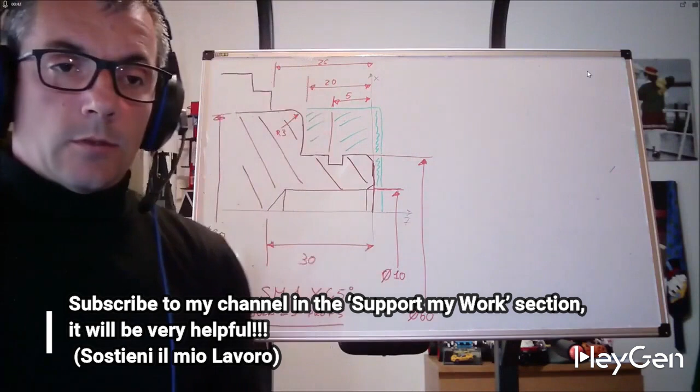We continue with our tutorial on CNC turning machine programming. So, we have seen in these videos that we can move in G0, G1 in linear interpolation by entering two coordinates and creating an inclined line according to the arrival point X and Z, or according to the angle. We know how to make chamfers, and we know how to make radii. We have recently discovered that we can correct our profile to make it exactly uniform with the drawing by adjusting the tool radius correction.

I tell you that outside of threading, if you have followed our tutorial up to this point, you are able to execute the programming of 100% of the parts that can be obtained for two-axis turning operations. Let's do a small example. This is a small example of a piece that I came up with. We have never talked about grooves, we have never talked about drilling, but we have talked about programming in X and Z. Nothing else is needed.

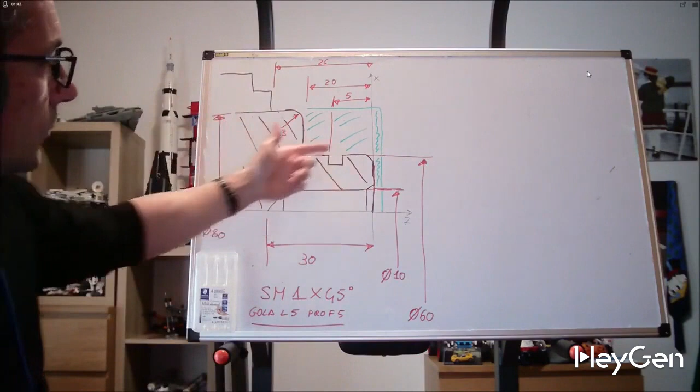Regarding how to manage ourselves, let's assume a metal piece, diameter 80, to be brought to this drawing with a 1 mm excess material on the face. So we will need to face it, hollow it out, drill, and make the groove. Okay, so the order of operations will then need to be optimized based on the tools, the turret, the operations we need to perform, and the type of finish. Let's not worry about that. Let's focus on making a small program. Unfortunately, I only have a whiteboard available, so we will go step by step.

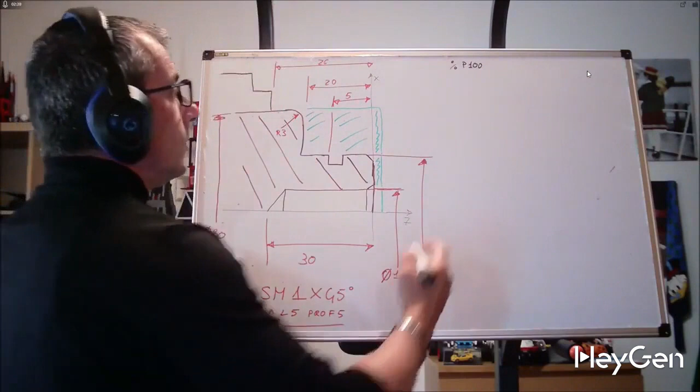So, let's take our program. At the beginning, we need to give our percentage. Let's call it 100. I will refrain from writing comments because otherwise the video would become particularly long and boring, so I will explain a few things. First, we need to set G92 S2000 to limit the revolutions when using a simulator. Here we will also define our raw material to allow the graphics to work for us, becoming our eyes, and we will see it later in the simulator before making adjustments and avoiding unpleasant surprises.

After that, we insert G95, so we tell our lathe that we will work in millimeters per revolution. Let's rotate our spindle. So M4 S200. G96, so it rotates in a sense. Sorry. Then it's not always necessary because small lathes don't have it. Lathes with gear changes will require M41 and M42. Let's set it. It won't hurt. And let's rewrite M4 S200.

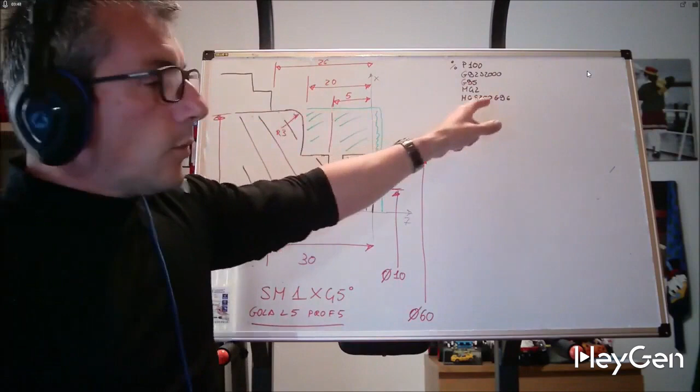G96. Perform the next turning operations at 200 meters per minute. So adjust the revolutions based on these 200 meters that must occur at the tip of our tool. So accelerate as I move towards the center with the limit set to G92. I call a turret T01, and here I will write a nice comment about what tool it is and what operation I'm going to perform. I am going to do the facing. That is, I want to remove all this excess metal in one go. Let's not worry about the correctness of the operations, but about the movements.

Okay, now in rapid G00, I will go to where the piece is. We said it is a raw material with a diameter of 80, so I will go to X85, giving it a 5 mm clearance before going to hit Z0. Okay, very educational. If I were on a machine, what would I have done first? First, a nice X200, Z300, then first Z0 and then X85. I have brought myself here. Perfect. G1, let's do this piece.

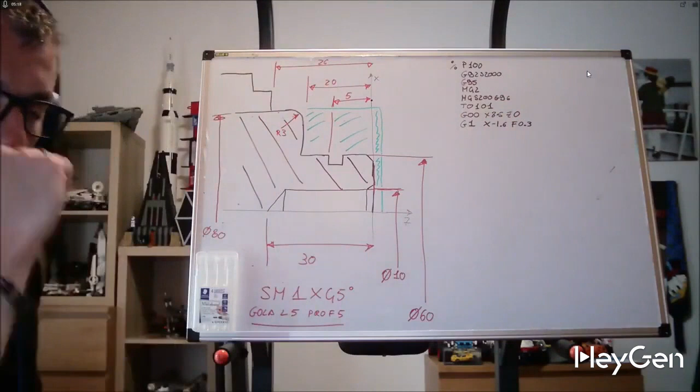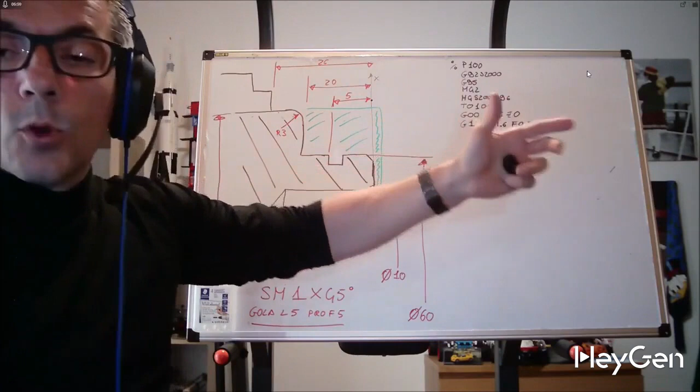G1 X0 actually. Let's say I have a tool radius of 0.8, so minus 1.6 F0.3. All right. This is definitely to get to this point, to correct the tool radius. Do not leave a small bevel at the tip. We have faced our piece. In fact, I always recommend reaching X10 and slowing down a bit, because if the tool is high or low, we could stress the tool tip. I provide you with this information, even though it's more about tooling than programming, but it's good to know. So normally I program G1 X10 F0.3, X-1.6 F0.1 to avoid stressing the tool tip too much.

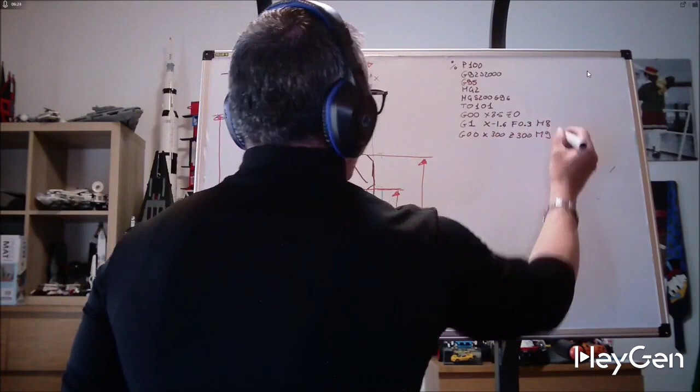Well, I have already faced it, so we have already eliminated this part. G0 X300 Z300. If I had put an M8 and an M9 here, I would have turned on the coolant during the facing and then turned it off. Okay, in some materials it is used, while in others it is not. This also goes beyond pure programming, depending on what you have in the machine. Here, it is not specified whether we are using G40 or G42 with a 0.4 radius, but now we are focusing, I repeat, on the tool path.

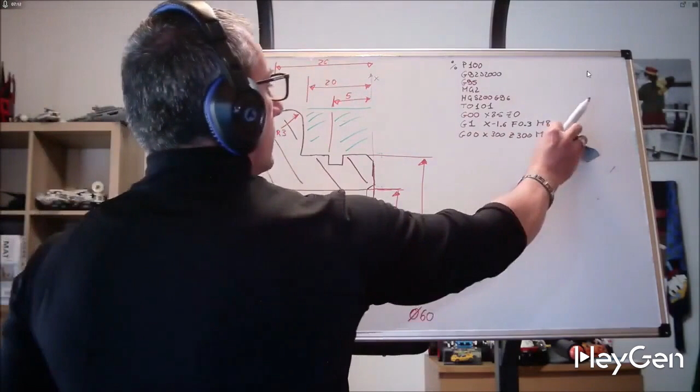Now, we know how to make the profile from point 0 and follow it all the way. This is because our concern is to move in space. Now with the same tool, if I want, I can go and remove all that excess material. So, instead of moving away completely, G0, Z3, I leave the water on. And then, still in G0, so I won't repeat it, X70, let's say we have a nice sturdy insert, and we can easily remove 10 mm at a time.

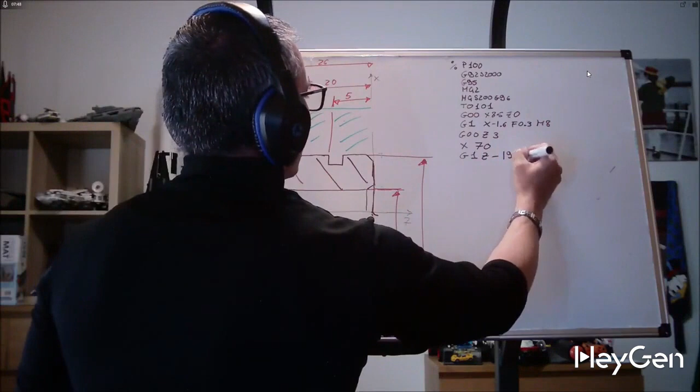So here, G1, Z-19.9. Z-19.9, I have roughened the first part. Now there are two ways to proceed. Excuse me a second, I never remember if U refers to X or Z. So here I can use U10. Do you remember? Incremental. In X, I raise by 10 mm, so I go back to 80.

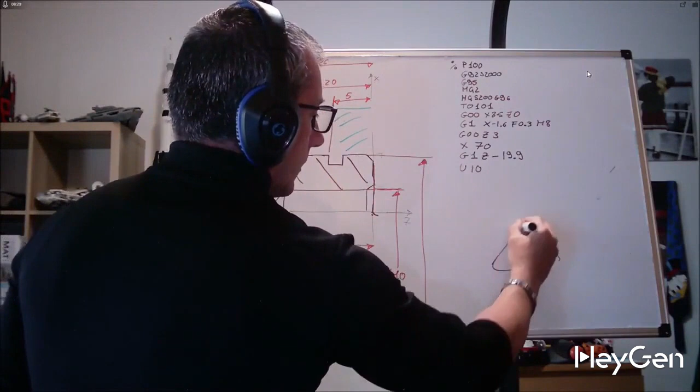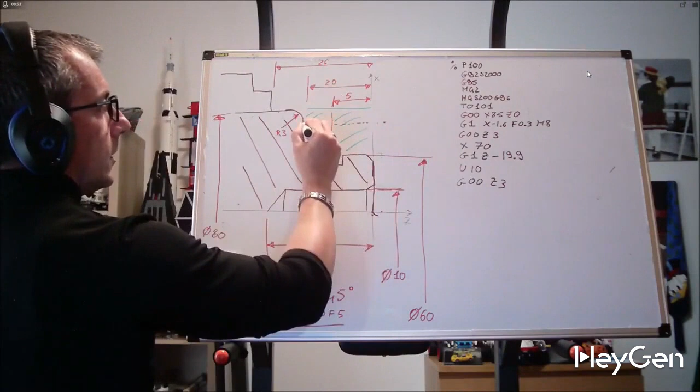And the possible inclination of the insert that is cutting is straightened to avoid unpleasant lines during the finishing phase, G0 Z3. So what I did: at Z3, I moved to X70 quickly, went to Z-19.9, U10, returned to X80, and then G0 Z3, I went back to Z3. Always check if you need to write U10 or U5, because some machines are radial, okay?

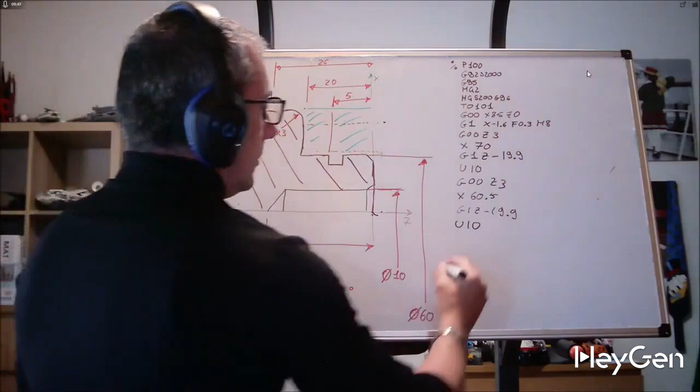Regarding just the U, perfect, Z3, X60. So I will write X60.5 because I leave a bit of excess material, and then I repeat what I wrote above. So G1 Z-19.9 U10. So I positioned myself here, made my pass, raised to straighten the tool's clearance angle, and at this point I can move away quickly. G00 X300 Z300. All this excess material is no longer there, and I did it with point-to-point programming. It's quite a mess.

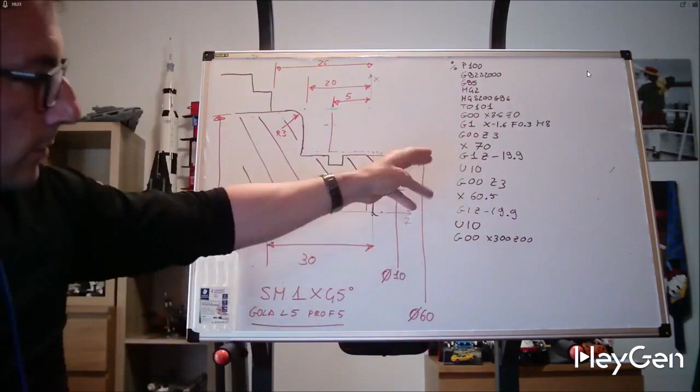Soon I will explain that it's not necessary to do all this, because if instead of 20 millimeters it were a rough diameter of 200, reaching 60, we would need to write 1000 of these lines. But CAD/CAM still output their programs like this, because it has its own logic. Fortunately, fixed cycles exist. In fact, at the end of this brief lesson, which mainly serves to help you understand that you have already learned to program, let's talk a little about fixed cycles and introduce the concept.

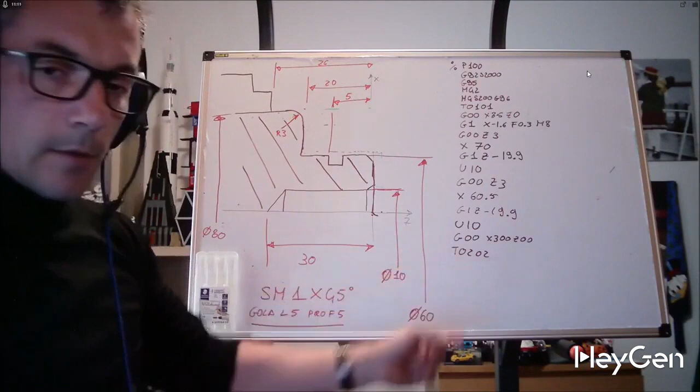Well, what do we do? We change the tool to finish, so T02. If necessary, the cutting speed is also changed. It is always better to include the cutting data when calling the tool. Why? Because if you interrupt the cycle halfway, you can start from the tool recall and it will already read the cutting data. G95 is not necessary, but M4, S200, G96, yes, F0.3 because here we will really take away very little. G96.

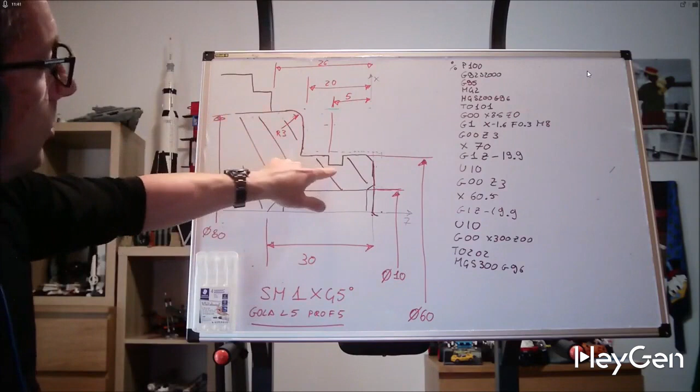Here I move over and do the finishing. So we have 1x45 chamfers, a cylindrical turning, a radius, and a groove that we will ignore for now, because to finish we will use a DNMG insert, a VNMG, at 35 degrees and 55 degrees. Obviously, I can't do the groove, so I will go quickly. G00 Z3. This is 1 for 59, but we are a bit lower, at X56. At this point, what am I going to insert? I will insert my tool radius compensation, G42, because I am moving the profile clockwise.

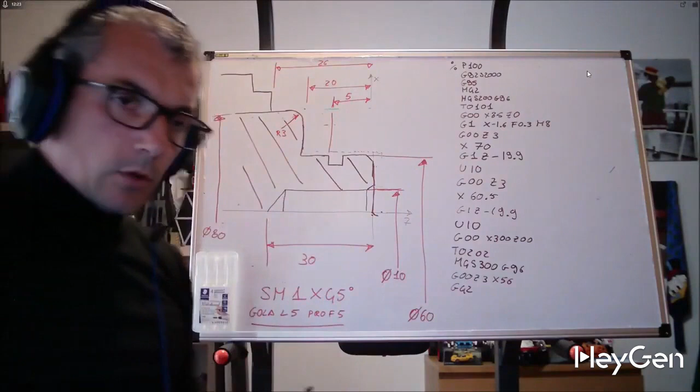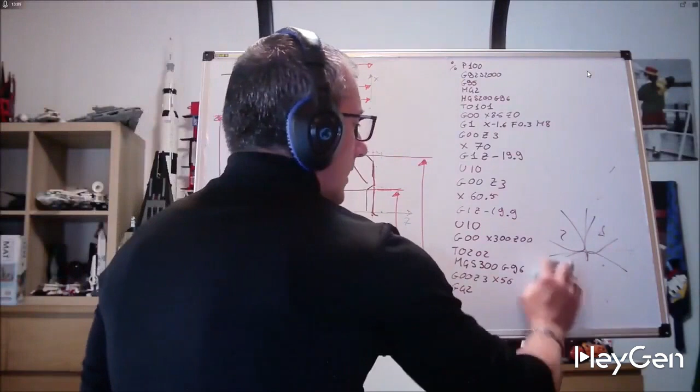G42 will work well if in the tool table, and we will see this later when we do the first program in the simulator, we have inserted the correct tool radius and the correct orientation of the tool. We have mounted an external tool, a boring tool, an external pull, or a boring tool in pull, 1, 2, 3, 4. Each machine has its own way of having this information. There are machines that require this information at the tool change, and fortunately the more modern ones ask for it graphically in the tool table.

We are already starting to get into some very interesting programming concepts, so follow me closely. I hope to convey all of them to you. If you listen the first time and don't understand, try watching the video again. You will see that the second or third time, especially when we take the simulator in hand, these concepts will definitely be much clearer.

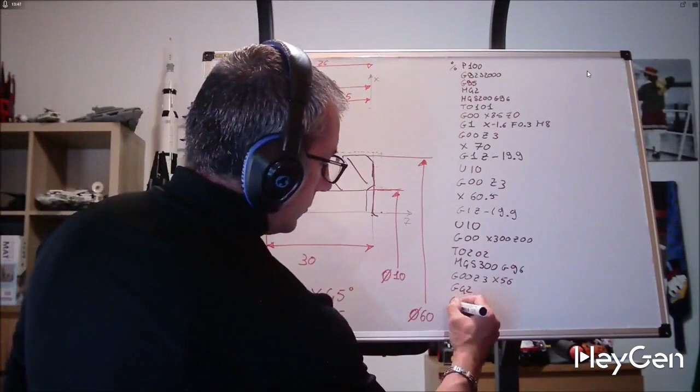Now notice that I have arrived at G00 and only after set G42, Z3, X56, then G1, Z0, F0.2. The first movement, from Z3 to Z0, must always be at least twice the radius of the tool. Otherwise, on some machines, G42 can be a bit troublesome. At this point, let's do our chamfer. Let's make a cool chamfer.

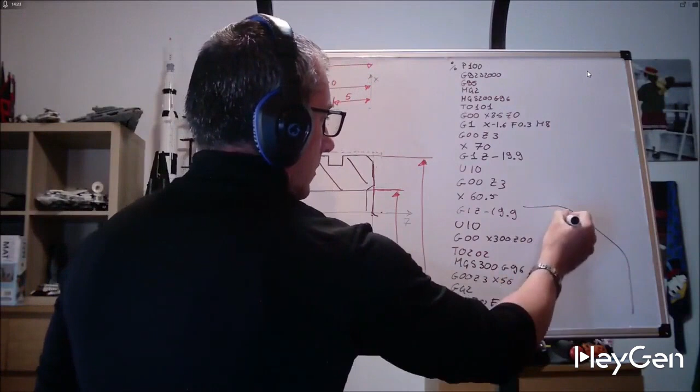So, a chamfer, according to the standards of the automotive industry. Here, and here, and in various other aspects here, are 0.15 R, 0.15 chamfer 1 for 45. This is a remarkably cool chamfer, as the Germans want it to be designed in such a way that we don't use C. Instead, we use both A and R parameters.

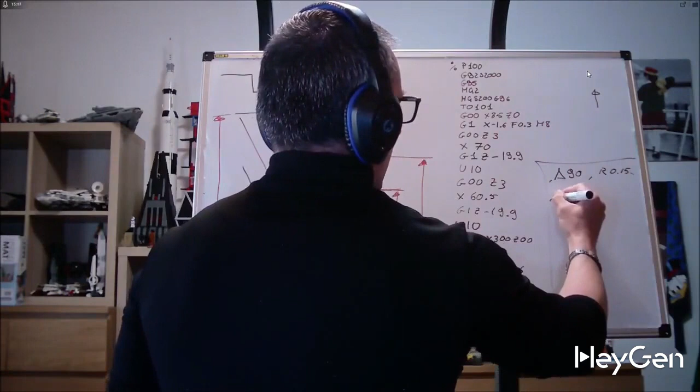How do we create such a chamfer? With our direct programming. So you can choose either option, comma, followed by an A, depending on which CNC machine you have, or also equal if your system supports Siemens, at an angle of 90 degrees, proceed upwards, comma, then R set at 0.15. A 135 Z minus 1. This is roughly a minus Z1 X60.

R0, I'm sorry, but I need to take up more space. As we said, comma, A 135 X60, Z minus 1, comma, R 0.15. What does it mean?

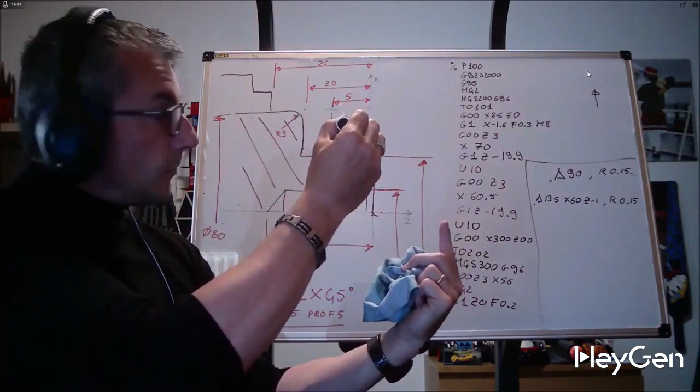I go to X56, Z0. I'm here, then I tell it to go up. At 90 degrees, I give it some information, you stop at Z minus 1 X60, and you reach 135 degrees, which is 45, and in both cases, it finishes the trajectory with a 0.15. Here the machine can go here, making the cool chamfer. G1, which is not necessary to repeat, Z minus 20 X80, comma,

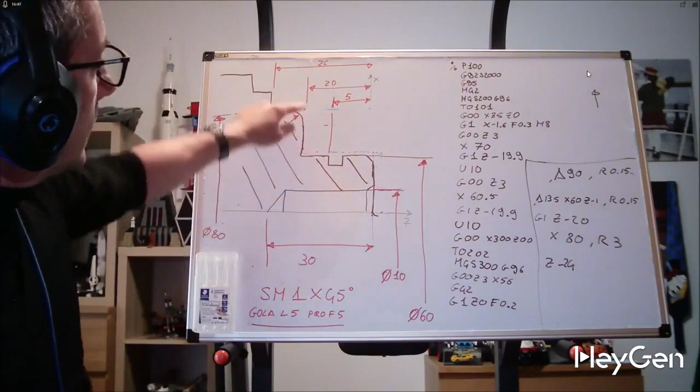R3, Z minus 24, and we have arrived here. Look, we have reached the end of the chamfer. G1, Z-20, X80, R3. So it finishes the trajectory with a radius of 3 and goes to Z-24. Be careful. If I had written Z22, I would have obtained a radius error. This Z must be at least 3 mm and a hundredth superior in movement, otherwise it can't give me the radius of 3.

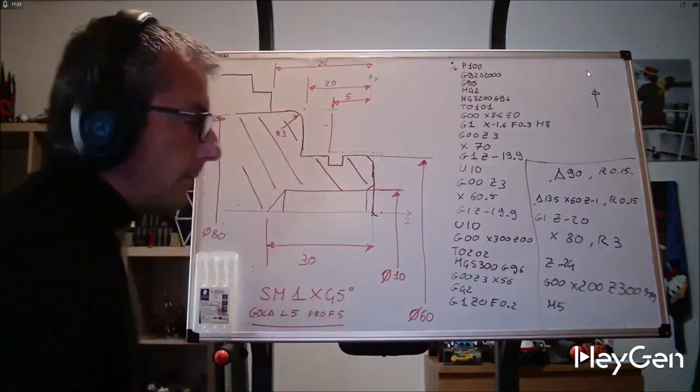G00 X200 Z300 M9 M5. Well, now I will continue programming M9 to stop the water that I turned on here, and M5 to stop the M4, that is the spindle. You see that with our programming made only of X and Z, without macros, without complicated things like macro instructions or fixed cycles, we have profiled our piece.

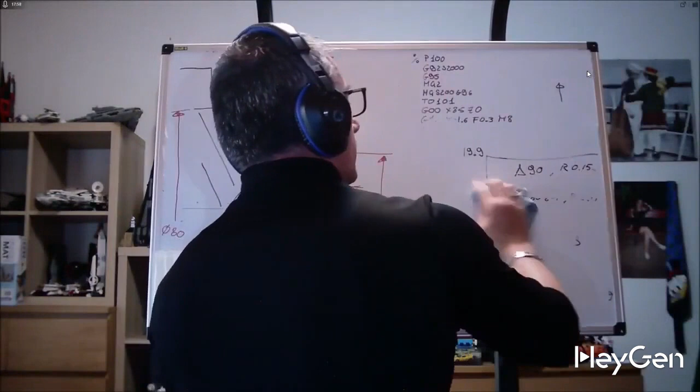Okay, we have profiled the piece, but now we have a hole to make. A hole or a groove is point to point. I will completely ignore this chamfer. So, to drill, just take a bit, zero it here in Z, and set it to 0 relative to X. So when I want to drill with a bit, I always drill at X0, unless I use an insert bit.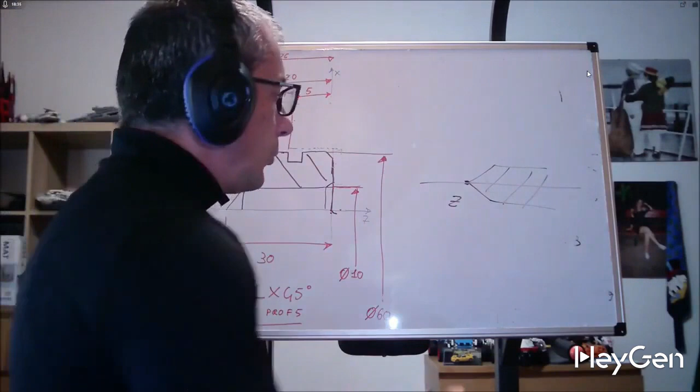The insert bits are 180 degree bits. If we look at them like this, they have an insert here that we will see, and an insert here that we won't see, interchangeable. If I have a 32 bit, I zero it at this point like a reamer and drill at X32. If I have a 40 bit, I drill at X40, with the small detail that they usually have 0.8 tenths depending on the diameter of the bit, even 1 and 2, a type of off-center. So a 32 bit can drill at 32.8.

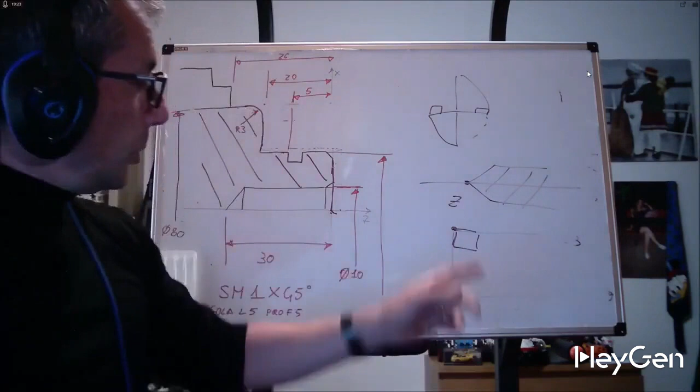Insert bits are very interesting because after drilling, they can retract and work like reamers. Okay, now we stick to the classic, to not complicate life too much. But we don't complicate our lives with insert bits. On the contrary, we make it much easier. Trust me. But let's stick to the classic and drill with a 10 spiral bit, simply. So, when drilling, nowadays the bits, unless using special materials or very long holes, a hole with a diameter of 10, approximately 30 millimeters. Therefore I call my tool holder

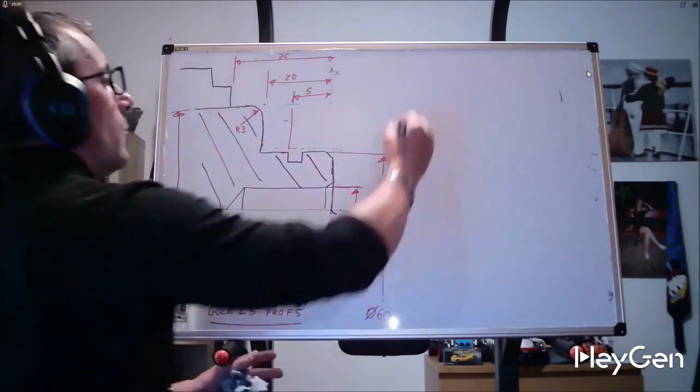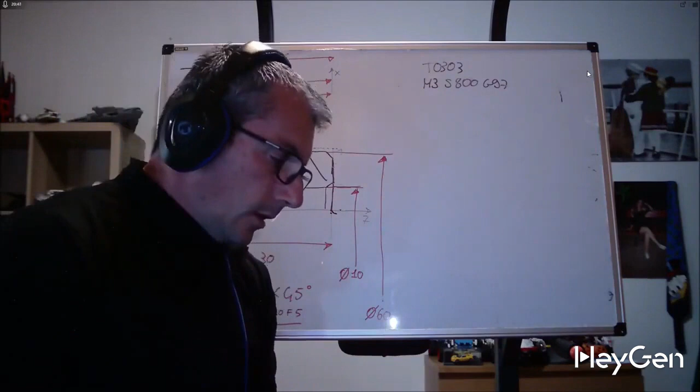The tip gets inserted into position. However, since they're programmed based on their diameters, one can operate them either with constant RPM, or choose constant cutting speed, both options providing great flexibility.

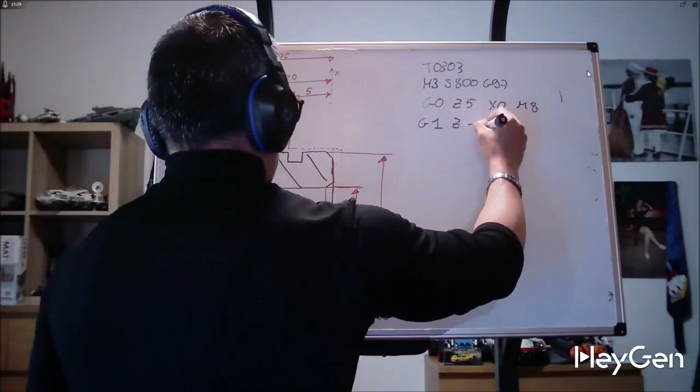X0. M8, water is always very important, essentially. I position myself right here in front, and then I proceed with G1, Z30, F0.12, G0, Z5, and I come out. I successfully made it brief, very high performance. An efficient drill, I enter in one solid body and exit.

In reality, we have specific macros that allow us to effectively break the chip, so we set the feed rate right away, so we absolutely don't have to worry about it anymore. F0.15, yes. Indeed, the feed can also be set in a single block, not G1. We will carry it forward until we eventually recall it. Then G1, Z5, let's do 10. Otherwise we'll do a lot of unnecessary steps. 10, W1.

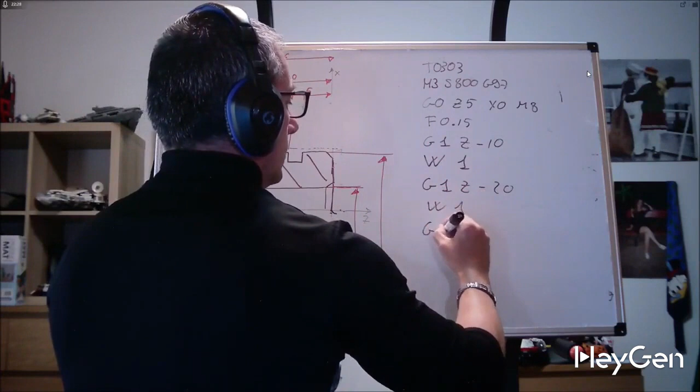G1, Z20, W1, G1, Z30, G0, Z5, every 10 millimeters. To the depth of the material, we have broken the chip. And then continue to ensure precision and accuracy in the process and maintain the integrity of the operation. We returned in incremental mode by 1 millimeter on the Z-axis and then moved forward to Z20, then incremental by 1 millimeter. Of course, we can do it millimeter by millimeter.

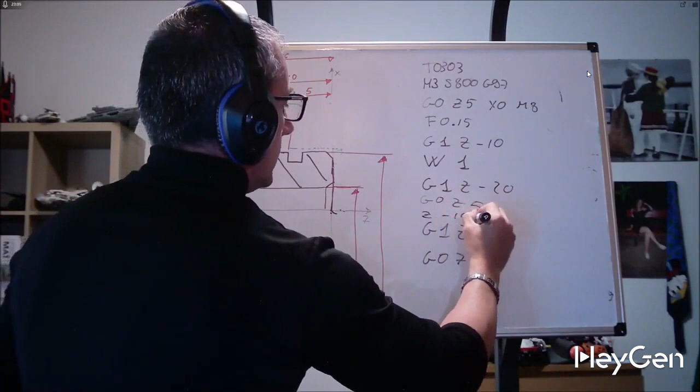We could even exit the piece, that is, instead of W1. Let's do it here instead of W1. We could put G0, Z5, Z19 here and then start. Okay, I mean to really clear the chip, because at the tips, chip sometimes doesn't break, it gets in the way, and when the chip doesn't break, what breaks is the tip.

Which macros help us? Okay, I repeat. With the current tips, especially on steels, there isn't this great necessity. But on aluminum maybe, because it doesn't clear. It can be useful on the FE that makes very long chips. It can be useful to have this discussion about chip breaking. The macros help us, but with our simple and straightforward programming, we can also do this.

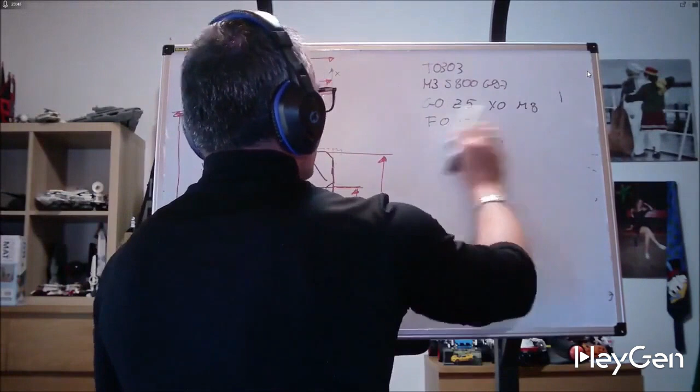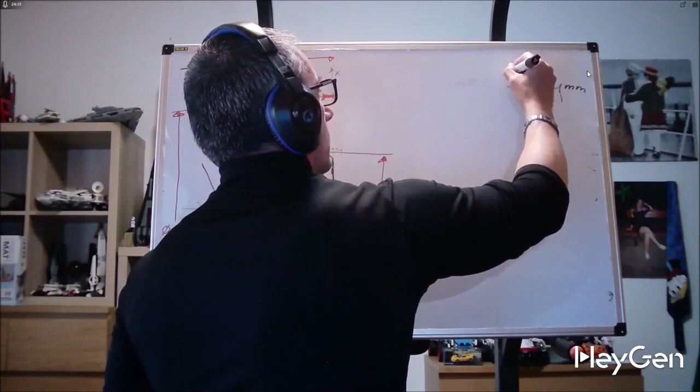Now we have drilled the piece. Let's leave the chamfer aside. Otherwise, this video will go on forever. But we have a groove. We can make a groove. I haven't taught you anything about grooves, and of course we can make a groove. Let's take our groove tool. We know that our tool has a thickness of 4 and we zero it. Well, we only need to move our virtual point according to X and Z, so our tool point. So what do we do?

We should position ourselves in the middle of the groove, truncate it, and then finish it, because this groove is made like this. I didn't draw it for you because I didn't have space before, and these two small chamfers can be, in fact, let's say one side is a radius and the other side is a chamfer. It's a tricky groove that really wants to annoy us. Well, we can certainly make this groove point by point, very simply. What do we do? Let's not worry, as always, about many things like chips.

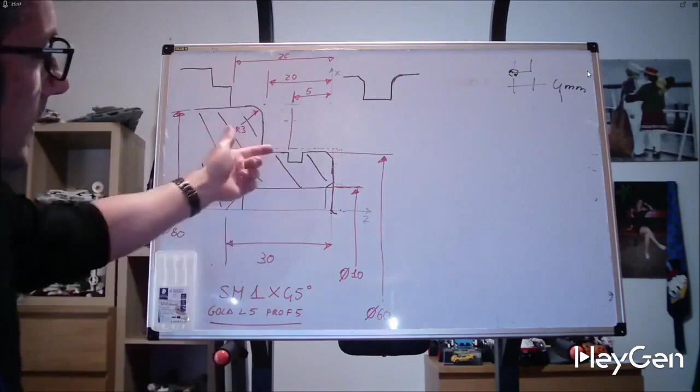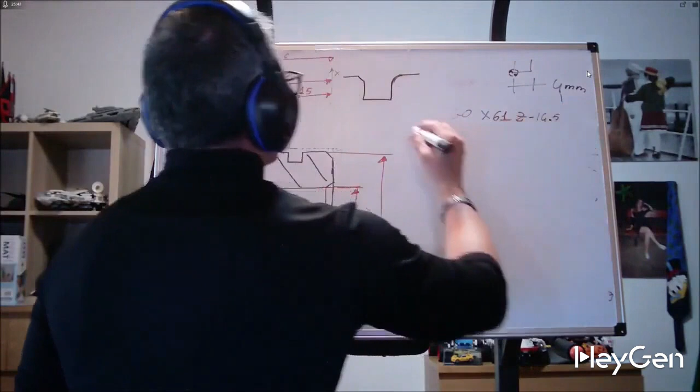The chamfer is 1, the radius is 1, the groove is 5 wide and 5 millimeters deep, which means it goes from a diameter of 60 down to a diameter of 50. Let's call the cutter blah blah blah, put in all the cutting data, generate it, M4, and in G0 we move to X61. I wrote Z5, but that's not right. Let's go to Z, minus 16.5. So we position ourselves here, more or less, then we tell it.

G1. Excuse me. 61. 60. Yes, no, written correctly. X. We said that a depth of 5 means that diametrically it is 10 millimeters. We say X50.3, F0.08. Be careful. At 50, we can go there in one go. That is, plunged. Or we can do the same thing.

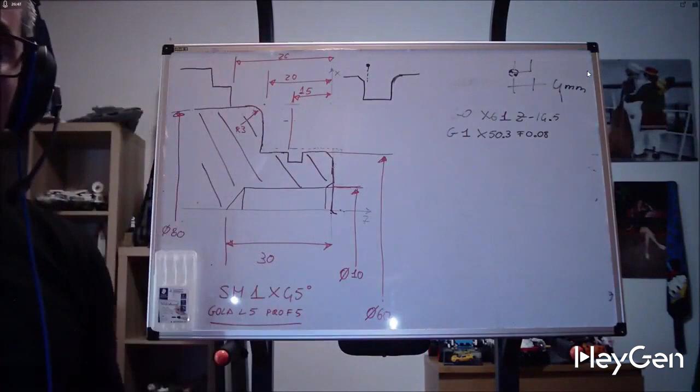After that, we move, return in G0 to X61, and we make this profile, taking into account the thickness of the groove. So Z minus, here is 15, let's say 16. We do not take into account the virtual radius of the tool in this case. We make exactly the profile. Then G1, X60, comma A in this direction. So in this direction, minus 45.

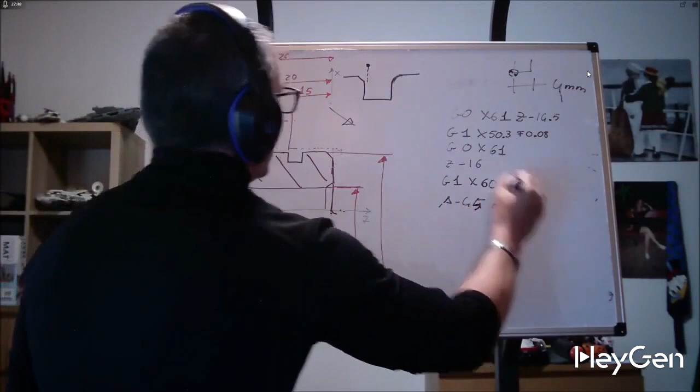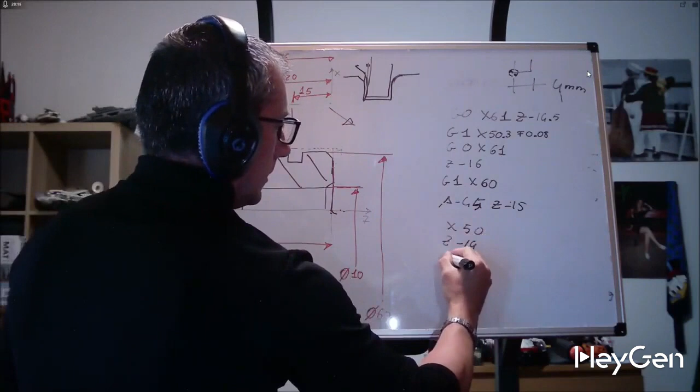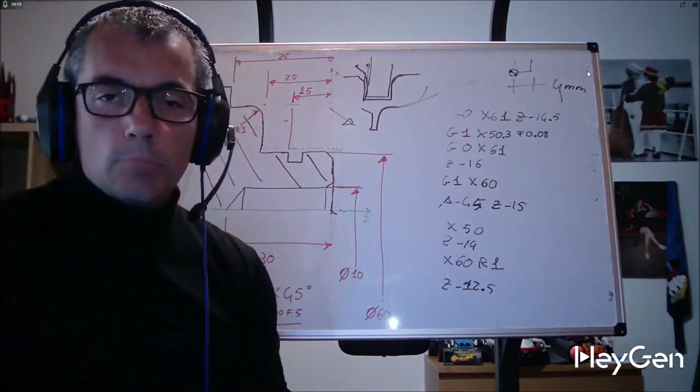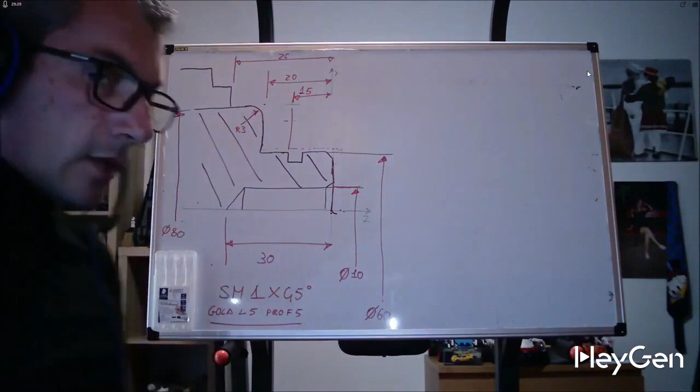You understand that making programs this way is quite complicated. It is not complicated, it is laborious. However, this does not allow me to perform a specific operation that cannot be done with point-to-point, namely threading and tapping, which are two twin operations. For tapping, there is a fixed cycle that we will see later. And for threading, there is both a fixed cycle and its dedicated interpolation.

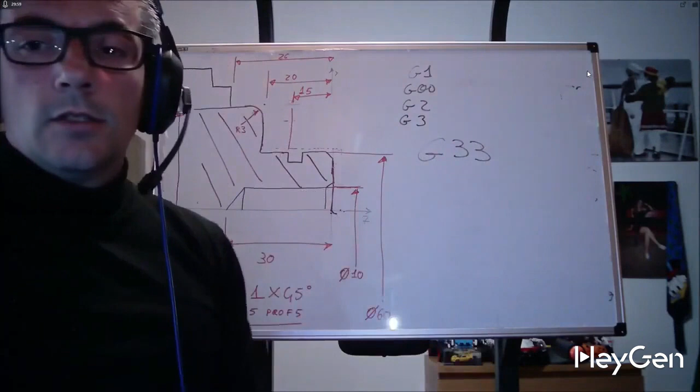G1 and G00 are linear interpolations, slow and fast. G2 and G3 are circular interpolations in one direction and the other. G33 is the threading interpolation. So if I wanted to make a thread here, M60 by 3, what should I do? I have to call the tool that does the threading, give the usual cutting data, and then tell it G0 Z3 X 60 for 3.

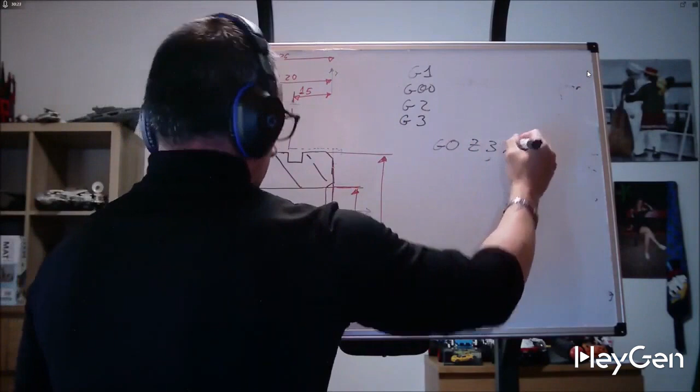So let's say X 59.5, G33 Z from here, almost 10 millimeters, so let's make at least Z minus 14. F3, where G33 tells the machine: I am making a thread. You will ask me what the difference is between a G1 at F3 and a G33 at F3. A thread is never made in one go, so when I finish G33, first of all it returns here.

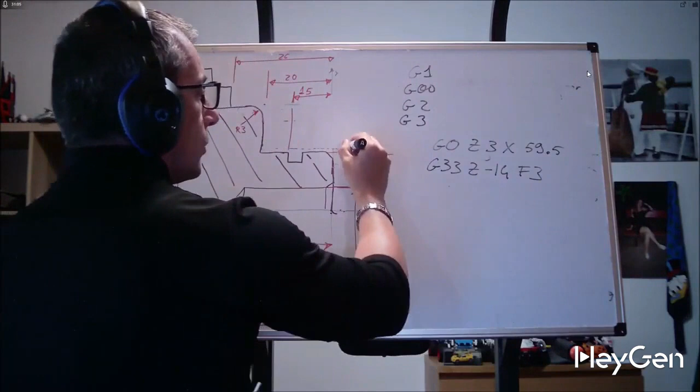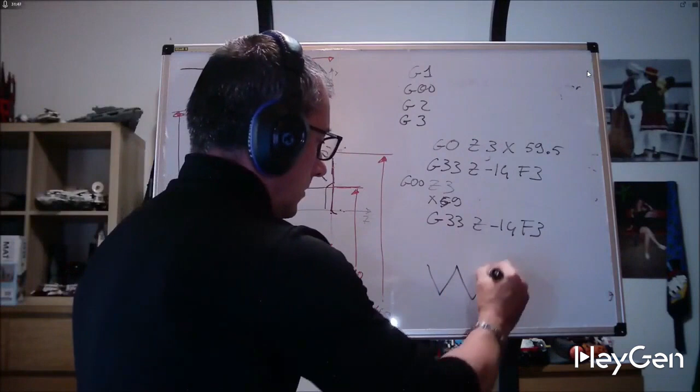So at this point I will tell it G0 X 59, G33 Z minus 14 F3. What does the machine do? It resumes the thread. I have a doubt about returning to Z3, so in case Z3, X 59, because one cannot make the whole thread at once. For example, the thread is too deep, and we want to make passes of 0.2, so we need to use G33 10 times. This is why G33, every time you repeat it, resumes the thread.

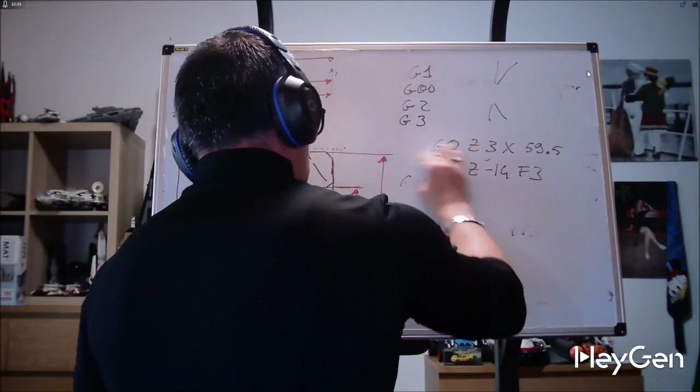So with G33 you are able to perform external or internal threading with a threading tool, but not with a tap. This is why the fixed threading cycle comes to our aid. So what are these fixed cycles? This is where it gets interesting, though the video is quite long. Fixed cycles are those that allow us to avoid writing 20 or 30 blocks.

I won't go into much detail about G33 because in practice it is almost useless, or at least it has always been for me. Then again, something is useless until you need it.

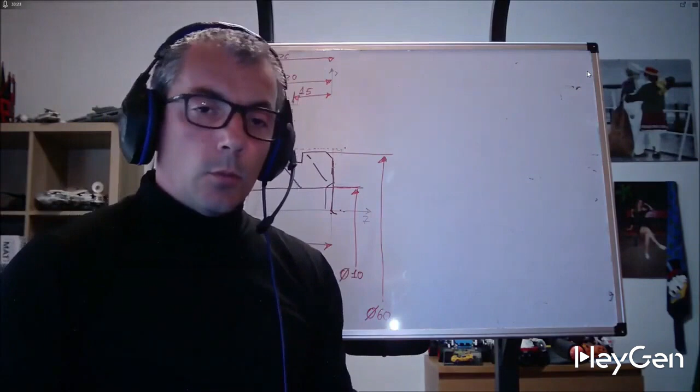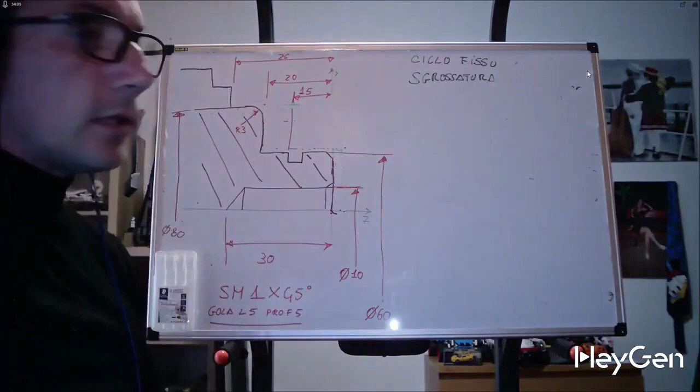Fixed cycles are those identified by a G, which in the case of external roughing can be G71, allowing you to summarize in a maximum of 2 lines what you would be forced to do in 20, 30 or 40 lines. The fixed roughing cycle allows you to determine the dimensions of the blank and rough out all this area, either internal or radial, with just 2 lines. Some details change, for example the G that distinguishes it.

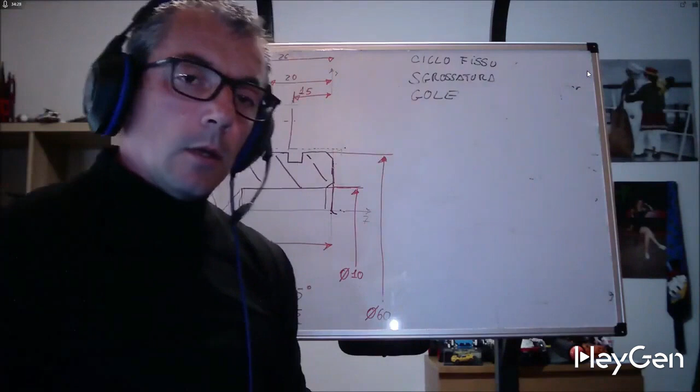Then there is the fixed cycle for front or radial grooves. It is especially useful when the grooves are large, because unlike conversational programming, it does not allow you to add chamfers, arcs and grooves. However, if you have a wide groove of 30 mm to make with a tool of size 4, 5 or 6, a fixed cycle will definitely be useful. Once you have determined the width, depth and position of the groove, it will clear it for you, breaking the chips. Then fixed cycles for threading, tapping, and drilling.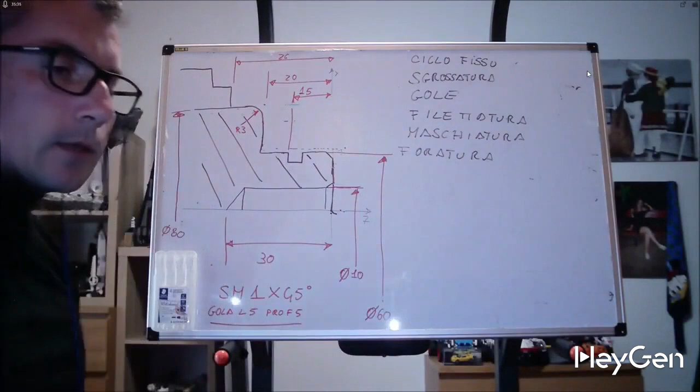Also, these fixed cycles for threading: once you provide the length, pitch, diameters, and depth of cut, it will handle the back and forth for you. Tapping cannot be programmed. It can only be done with a fixed cycle because you need to enter at a certain feed rate, gradually slow down the spindle speed until it completely stops, reverse the direction of rotation gently, and exit. Therefore, tapping is not programmable in standard ISO, but requires a fixed cycle.

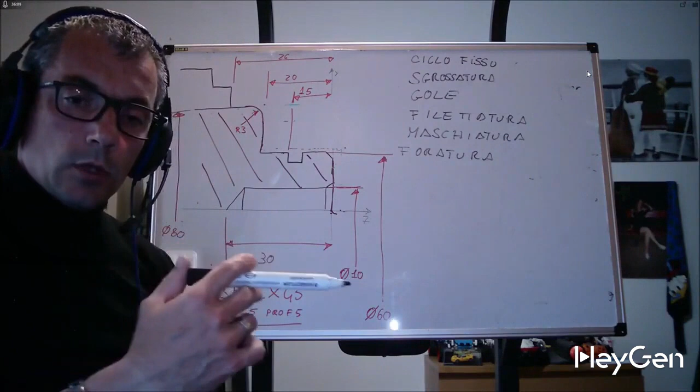Drilling, as I mentioned earlier, is now done with modern tools, but it is a fixed cycle that allows you to enter, exit, and detach. So, if you want to stop for just a second to break the chips or exit the hole, say you have a hole with a drill 7 times the diameter, you will definitely need to exit the hole sooner or later to evacuate the chips. The fixed cycle does this for you.

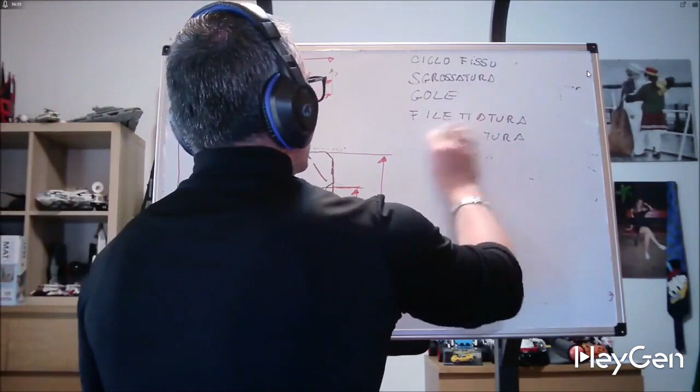Okay, so in the next videos we will look at all these fixed cycles. Obviously I skipped it because it is really basic. There is also a fixed finishing cycle, meaning when I have roughed, I can also finish with a fixed cycle without having to repeat the profile multiple times. If I forgot any fixed cycle, don't worry. If someone is already experienced, don't jump on the chair, because we will see a bit of everything.

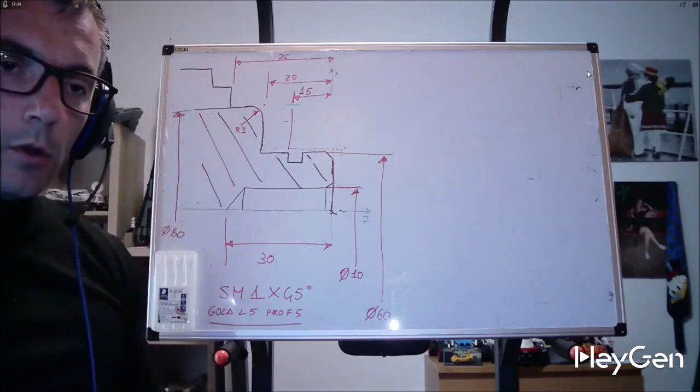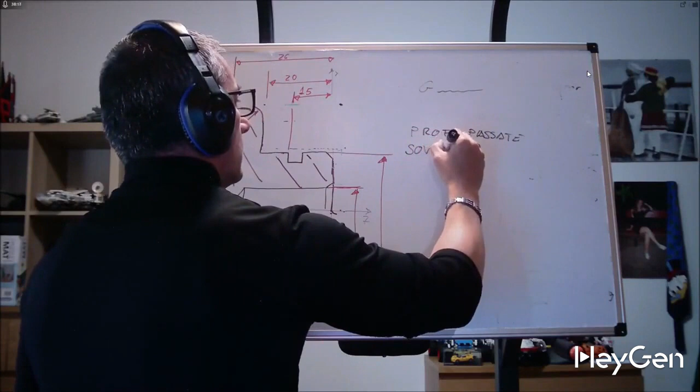After that, we will need to position our machine at a point almost coinciding with the extreme point of our blank and give our machine what? The depth of our cuts, the excess material in X and Z, that is how much excess material I will leave for the finishing tool. And the so-called disengagement distance, that is every time I rough, how much I need to disengage before returning. Given these simple codes, what does the machine do? It will read the finishing profile and adjust all those passes that we have set.

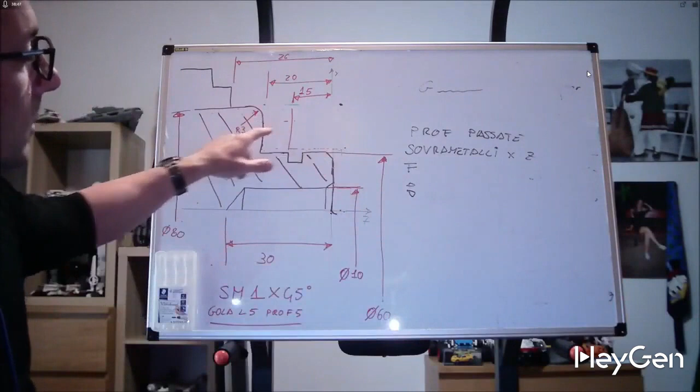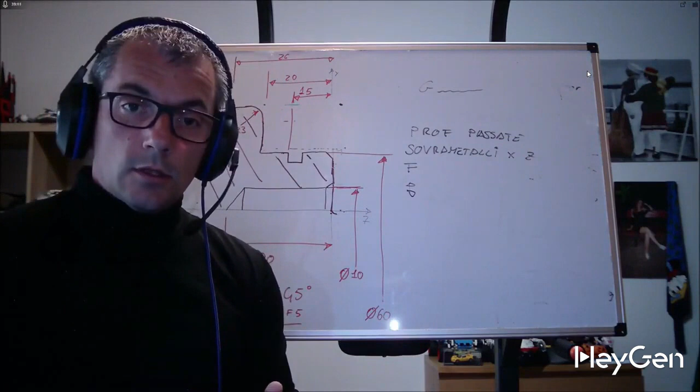I hope not to bore you too much, but I also don't want to rush, so I prefer to explain things gradually. Today you understood that with point-to-point programming and direct programming, you are capable of making any required profile in turning. The only thing is you need to do many steps, many blocks, and you have to write a lot of code to do it. However, by now, you are able to create a profile, make grooves, and the grooves we saw on the diameter can also be made head-on with the same principle. You can make a hole.

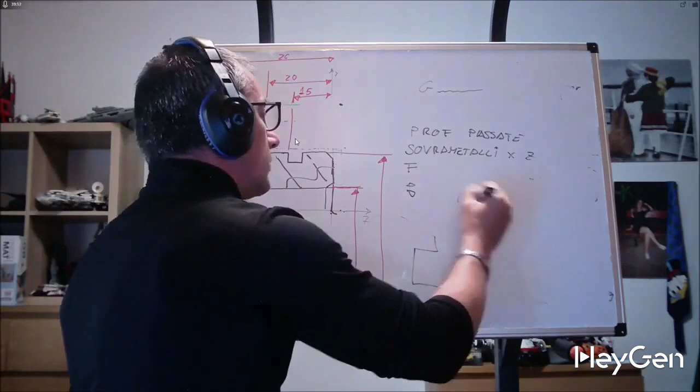So if you can make a profile externally, you can also do it internally, and with G33, one pass at a time, you can also make threads inside and outside. What more do you want from life? You are missing only the macros. And I would say that already, with everything I have shown you so far, you can do most of the work. Well, I hope I haven't bored you too much.

Next time we will see the internal, external, longitudinal, and parallel roughing macro, and of course the finishing macro, as the two go together. We will start practicing with the simulator.

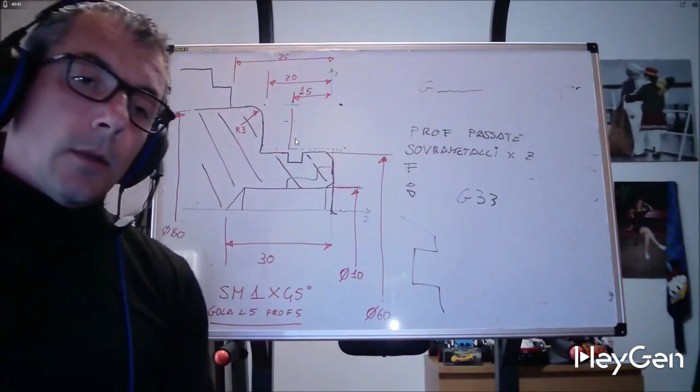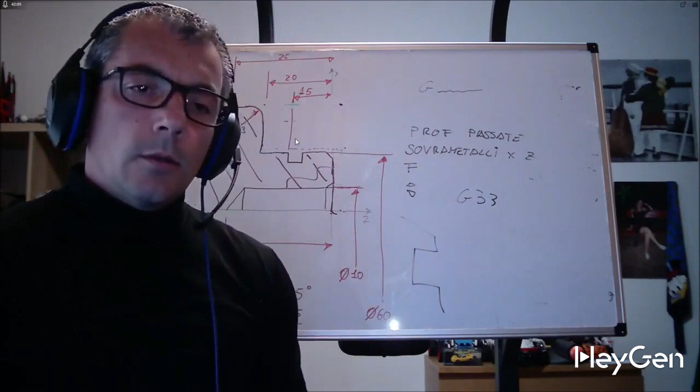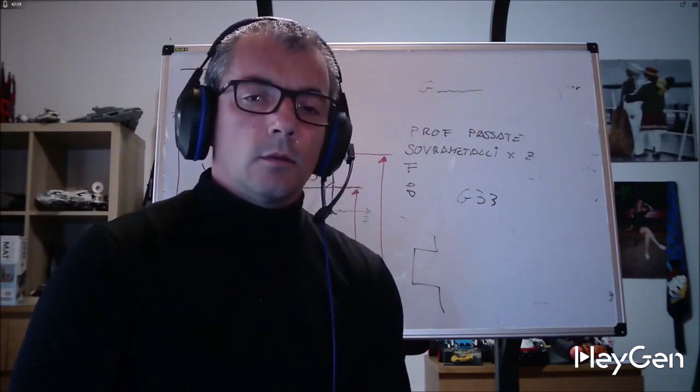Once installed, you have 30 days to practice. After these 30 days, it becomes a demo, so the fun ends. You can install the software on your little sister's or brother's PC, or your child's if you are old like me, and use it for another 30 days. So don't rush to download it. Follow some tutorials first, and when you feel ready, download it, and you will see that with it you will practice very, very well.